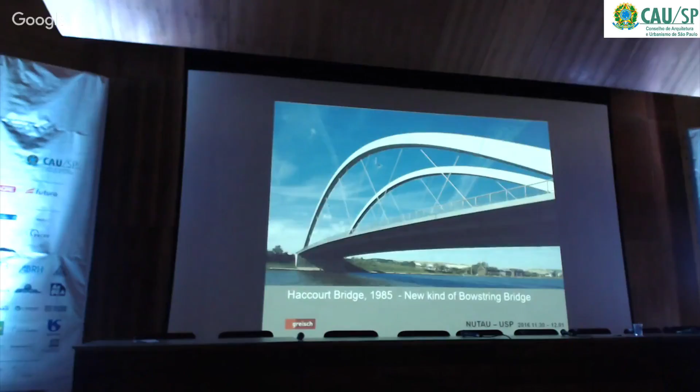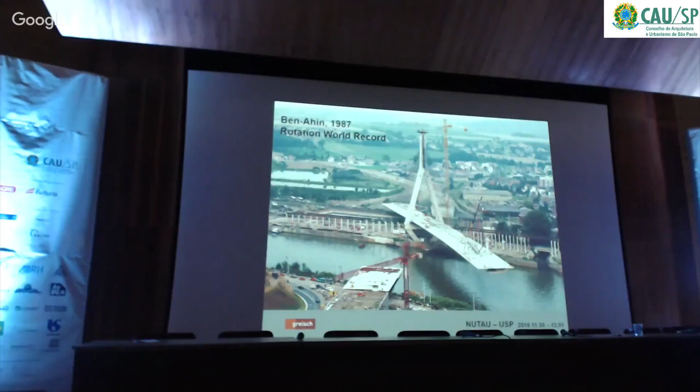I will go quite quickly through a series of projects that we made during the last decades, such as bowstrings here over the Albert Canal. Another one, which is a bit different, but we always strive for simplicity and for logical integration. This one was a cable-stayed bridge, which was built on the side of the river, and then was turned into its final position. And I show you this example because one of the specificities of our studies is that we always try to find clever ways to build the structures in a safer way, quicker, and also to improve the quality of the final elements, such as concrete parts.

This is another realization in Tournai along the Scheldt. And for this realization, we've worked with French designer Nicolas Michelin, because as a study office, mainly composed of engineers, we are, I would say, daily working with town planners, urban landscapers, architects from other offices. So this is really rich, and it's important for the project to mix all competencies, all knowledge from town planners and engineers.

This is another example that has nothing to do with waterways, but I wanted to show you because it was quite funny. It was built completely on the ground, and it was then rotated into its vertical position. It also had a lot of advantages for safety reasons and for the rapidity of the construction. This is another bridge which I'm really proud of. It's called Eau Rouge, and it crosses a valley which is a very sensitive environmental area. And so we had to do this huge arch with the simplest structure possible.

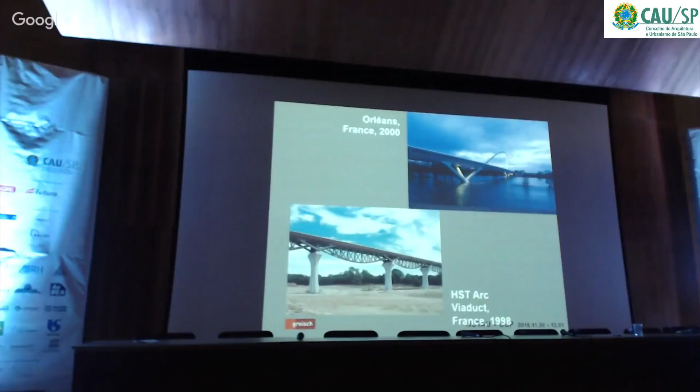Those are high-speed trains, high-speed train bridges. This one studied with a French architect, and this one was designed by Santiago Calatrava in Orléans, and we made stability studies for this complicated bridge.

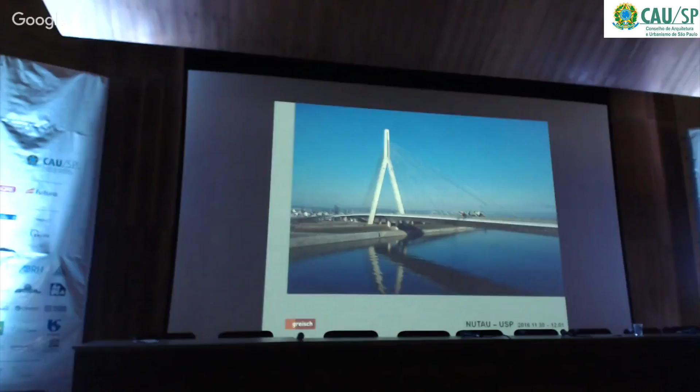There's another example. This one is ours, so sometimes we do the architecture ourselves, and this is the case for this bridge in Monfort. This one was the last bridge of René Greisch. A few months before his death, it was inaugurated. It's a footbridge in Maastricht, in the Netherlands, with a single arch, and it connects a new housing area and the park on the opposite side of the museum. It's very much appreciated by the citizens and the bikers.

This is another example of what we can study. Again, with architect Santiago Calatrava. This is the railway station in Liège, where we had to do all the stability studies of this complicated structure, but a really fantastic station. I live in Liège, and this is really something that enhances the quality of a whole city.

This is another example of structures that we are to study. This is a tower that's in Qatar. This one was also a great achievement. It's a new viaduct in the south of France, designed by architect Norman Foster from England, for which we did all the stability studies.

As another field of activity, we are also specialized in airport infrastructures. And this is another example of a bridge that we designed ourselves. It's at La Réunion, so in the Indian Ocean, where there are lots of huge valleys, as this one, where lava runs through to the ocean. So it gives the occasion to design quite interesting bridges.

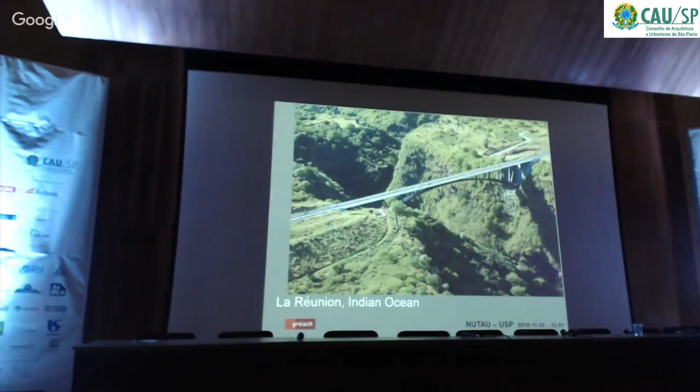This one is the last bridge we studied in an international consortium, and it's in Istanbul. It's the third crossing of the Bosphorus, so it's a bridge of more than 1.4 kilometer span, and it combines two techniques: the technique of cable-stayed bridge and the technique of suspension bridge, which is quite new.

This is the financial tower in Liège. We just finished it with architect Jaspers from Brussels. And this will connect us to the waterways, because for this new lock in Ampsin, the study has just been finished. The project is in tender phase and will start probably next summer.

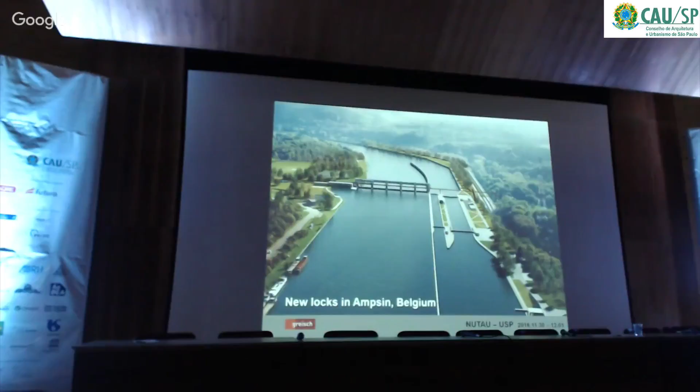It's a very multicultural, multi-disciplinary project, with two locks, with a footpath, new buildings, some landscaping with a path for the fish passage to help the fish to cross the 5-meter difference of levels between the two water levels, and it also includes some railroads. So this is the kind of project that we appreciate, because they mix up a lot of different aspects.

And to end up, I'll show you just a picture of our office during a meeting. So it's open so that everybody can work and talk with everybody. And it's in the forest, so that we keep a quiet atmosphere to think and to be as efficient as possible.

So I go on with the topics of the day. This is the program, the schedule of my presentation. I'll start with a general introduction, 2 examples that were not studied by our office, but that for me are quite representative of what I want to tell you today, and I'll end up with 3 quick cases, 3 structures that we studied ourselves.

So first of all, I start with a picture of the Port of Antwerp. We've already spoken a lot of this huge port yesterday, about more than 8 million containers a year. It happens in all the marine harbors throughout the world. They are getting bigger and bigger, and they accept large boats every day.

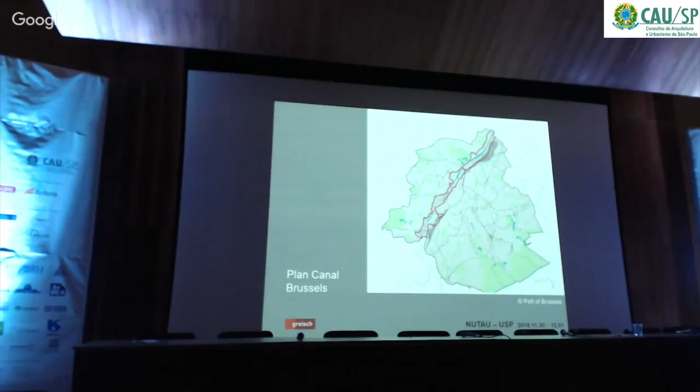So to deal with these questions, I will have a first example, which is the Port of Brussels. Here you see a general map of Brussels, and this red line figures what is now called the perimeter of the Plan Canal. You must know that through Brussels runs a small river which is called the Senne, not the Seine like in Paris. It's nearly the same, but it's Senne, and it used to be a very little river that has been transformed into a channel. So the boats can ship through the center of Brussels through the channel. And it has been one of the major factors of the economic development of the town, mainly for cement fabrication. So this channel and all the port zones located next to it were very important for the growth of the city.

And I was talking to you about the Plan Canal because Brussels is subject to the same prospects I was just talking about. The boats are too big, they don't come inside the city anymore, and besides that there is a certain reduction of, how can I say, heavy industry inside the city. So the surface here in this red line is about 700 acres that the city wants to reorganize following three main goals. Keep the economic activity inside the city. There is still a certain activity with the distribution of cars, for example, throughout Europe. They want to hold it. They have to create housing as an answer to the demographic boom. They expect about 7% over the next 10 years, which makes a lot of people to host. And improve the public spaces.

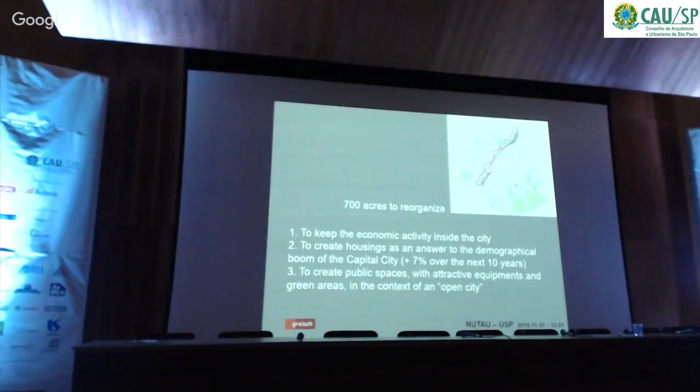What can I say? You've got different kinds of atmospheres along the canal in Brussels. Here you are in an industrial area, linked to cement as I told you earlier, and you can see that the surroundings are mainly devoted to industrial activities. This is another point in the city, still the channel, and you see that it's much more a housing zone.

There are innovative neighborhoods, so the answer that the Plan Canal wants to give is different from one point to another. I'll show you one example: the old Quai des Matériaux, the so-called materials quay, which is now subject to a transformation. This is a simulation of a project by MSA, a Brussels architect company, which will be realized over the next year.

This is an example of the reappropriation of public spaces along the channel. I will talk about the example of Copenhagen, which is very interesting as well. This is a general map; the city of Copenhagen is located here. Those are all channels that are now not used anymore. This is the main channel that used to drain all the navigation through the city, and this is the whole harbor zone. Here with the arrow you see those old docks.

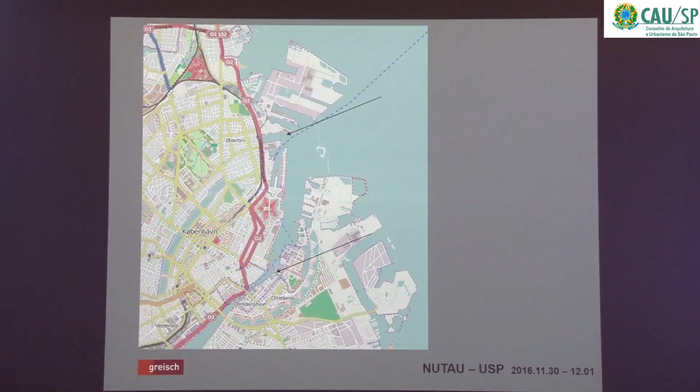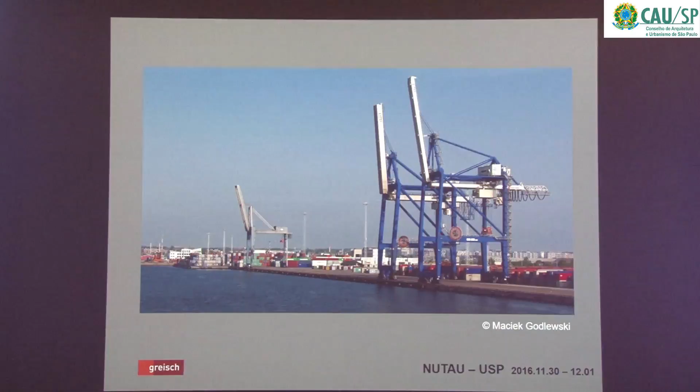For the same reasons I told before, they had to move their port outside the city, as it seemed logical that all marine boats could more easily moor over there. The question was, of course, what are we going to do with those old docks? And they had very interesting answers. This is the kind of landscape you can have in the new harbor, which fits very well with downtown surroundings. So what have they done?

Such kind of things. I think there's a problem with the picture. Sorry, I don't think it's okay.

They have modified their old docks. All the buildings you see there are old warehouses where you can still find the old hooks and structures used to hang the goods discharged from the boats mooring along these walls. And they have changed it, in this case, into housing.

In this case, this was the oldest dock in Copenhagen — it's almost a postcard view. It's called Nyhavn, which was called 'new' at this time, but it's not anymore that new. It's now devoted to tourism and tourism boats.

This is another dock that was transformed into housing and a bathing area. We are closely connected to the sea, as you saw on the map, and people are diving in — well, it's not the sea, it's the channel, but it's closely connected to it. You see all those wooden installations that really give the dock back to the citizens. This is something really important.

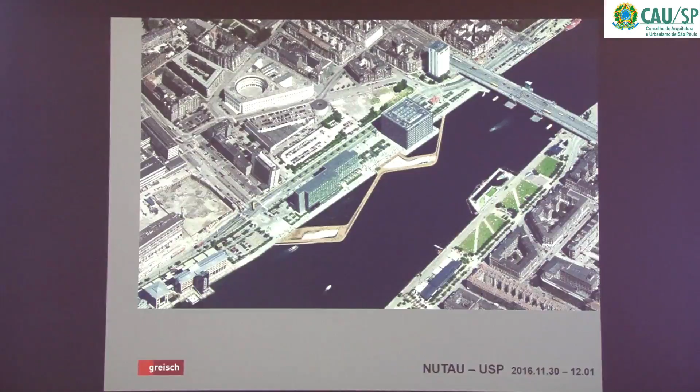An aerial view gives you another example of what they've done with their channel, which was finally too wide — it's funny to say, but starting from something too small, you finally come to something too wide. So they gained some touristic surface upon the river, thanks to Belgian architect Julien de Smedt, to offer these kinds of structures. It has combined with all the other zones I showed you before, and has really given a second life to the river and to all its inhabitants.

Going along the river by bike on both banks is really something fascinating to do.

Having these examples in mind, I will now come to a more technical part of my presentation with three different cases: first, the Port of Liège; second, the Lanaye Lock Complex; and third, the Sart Canal Bridge. I've chosen these three examples because they form a kind of trilogy of what you need to improve an inland waterway due to increased traffic. First, you need ports; second, you need locks; and third, you need improved waterways. So that's a bit of a mix of what we have implemented in this prospect.

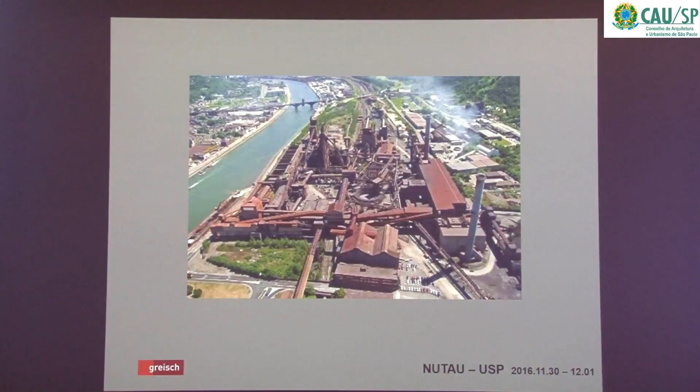First, about the city itself: I wanted to tell you that Liège has always been a steel industry town, where there was a lot of coal — in the past century there was a lot of coal around the city. So there's always been a tradition of steel making in Liège, as you can see in these pictures. Well, most of these industries are now closed because it's the rule in Europe — you don't get the chance to make your own steel anymore, it's not competitive. But it's one of the reasons for the growth of the Port of Liège: the fact that we had steel to sell.

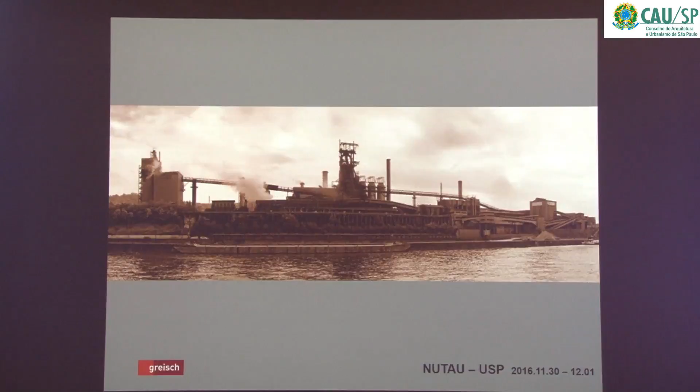Liège is located at a very interesting position in the European market. 60% of the European purchasing power is located within a radius of 500 kilometers, and 56 million consumers within a radius of 250 kilometers. So it's very important for a city like Liège, which is not located along the coast, to have close connections to different transport networks - water, rail, and road must be efficient to reach those different markets.

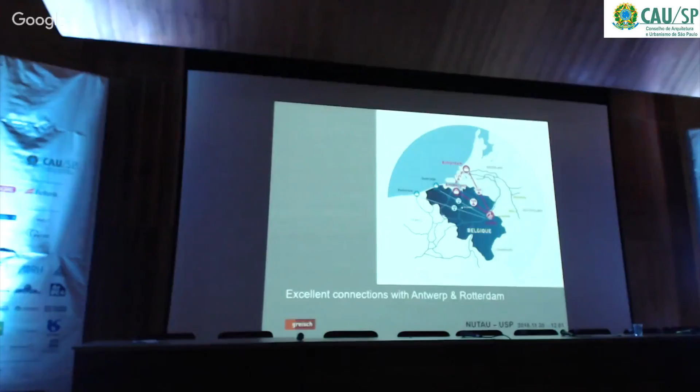Another aspect linked to waterways is the connection with Antwerp and Rotterdam. It takes only 14 hours to reach Antwerp, 12 hours more to go to Rotterdam. You've seen the huge amount of goods that have to be transferred from these ports, so it's very important to have close connections with these huge infrastructures.

Other connections are also achieved thanks to other ways. Antwerp is only 130 kilometers by road, Brussels 100 kilometers by road or rail, Cologne 120 by road or rail, Paris 360, Maastricht 30 kilometers by waterway, and Aachen in Germany 60 kilometers.

About the capacities of the Port of Liège, in 2015 the waterway traffic was almost 15 million tons, and with railroad the total traffic was 20 million tons, and we had about 40,000 containers. The important number is this one: plus 27%.

This is something in a very fast increase, and this is the reason why we needed to extend the port. Actually, there are 3 multimodal platforms in Liège.

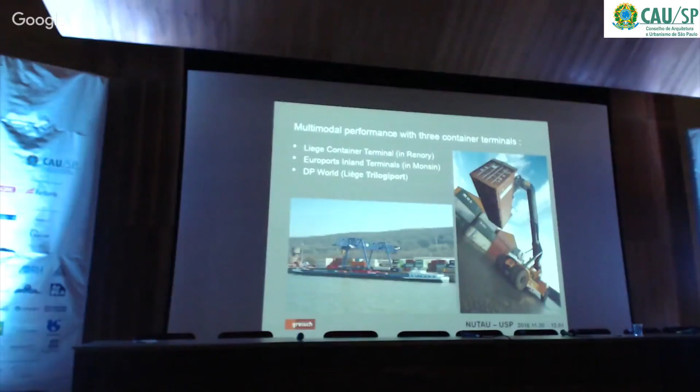We don't escape the same rule as all the other cities; we have to push our harbors outside. What does the new platform offer? Free access to the sea - Antwerp, Rotterdam, and Bruges - 3 transit modes (water, rail, and road), and 3 cross-border markets. It might, at long term, multiply by 5 the number of containers that we have each year.

This is the main organization of the platform. I'll start with a bit of logistics, and come back afterwards to the concept of the platform itself. Here is the canal, here is the container terminal, and here are all the portuary zones with the logistics support. Here is the green belt that has been achieved to protect the village situated next to it.

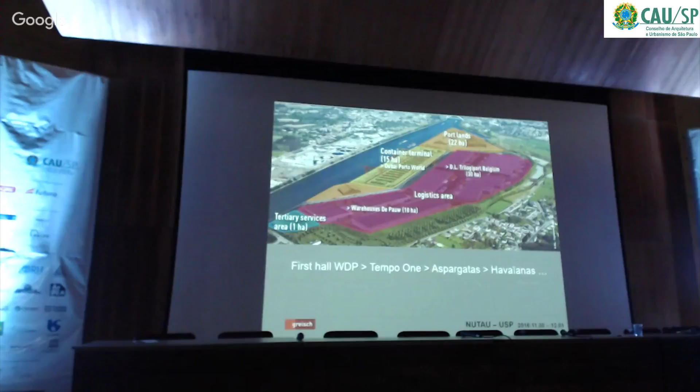I have just a small funny story to tell you. The first hall has been built, owned by Warehouses De Pauw, but the exploitation has been conceded to a French group, Tempo One, which distributes all the products of the Brazilian firm Alpargatas in Europe, including the Havaianas. So maybe Liège is a bit connected to Sao Paulo thanks to this.

Another important aspect is that you don't build such infrastructure on your own; it's important to be connected in an industrial network. This is the case thanks to the relation with the Port of Antwerp and the SPI, which is a local activating partner. And now the first containers have arrived on the platform, so the new container terminal is launched.

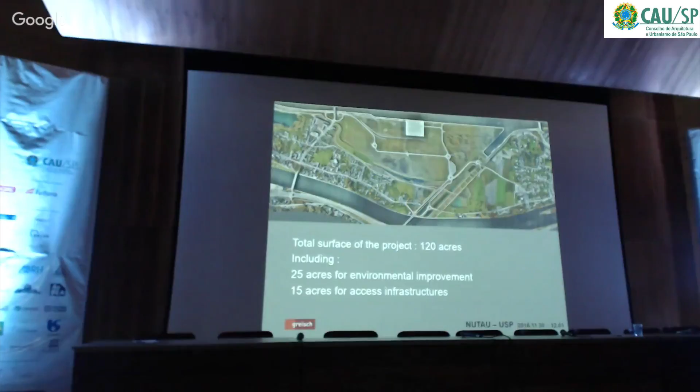So in the project, we have constructed a road network, including a bridge over the highway and the roads, and a series of water zones that are devoted to environmental developments as well as cycling tracks. This is a future view of the complex when it's finished with its series of roads, the full terminal, and some grass surfaces. What is important to see is this green belt, which is half made out of water plants and half made of forest and footpath.

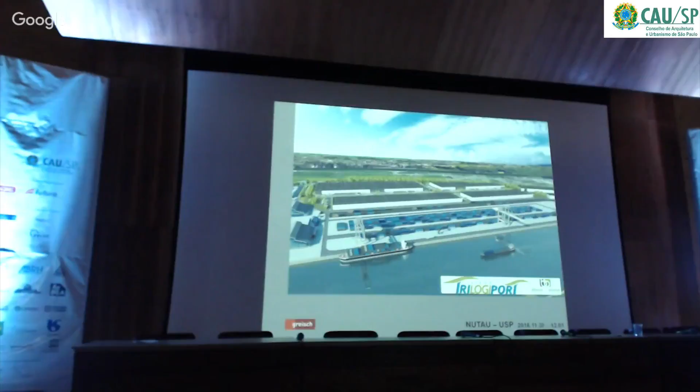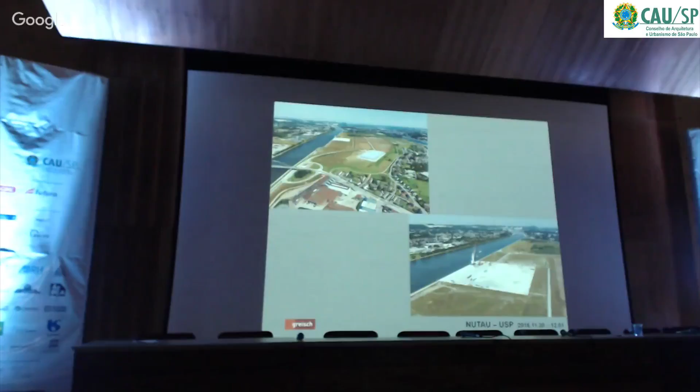This is another view of the completed area, over a few years, when all the structures will be built. Here are a few pictures of the situation today. This is the first hall that has been built. This is the first third of the terminal that is also already in function. And this is the green zone that is starting to grow because trees need a bit of time.

This is the new bridge that we have designed to cross the river and to give a direct access to the zone, because this was also one of the aims - not to disturb the life in the local villages. So this bridge was really dedicated to give a direct access from the highway to the industrial area.

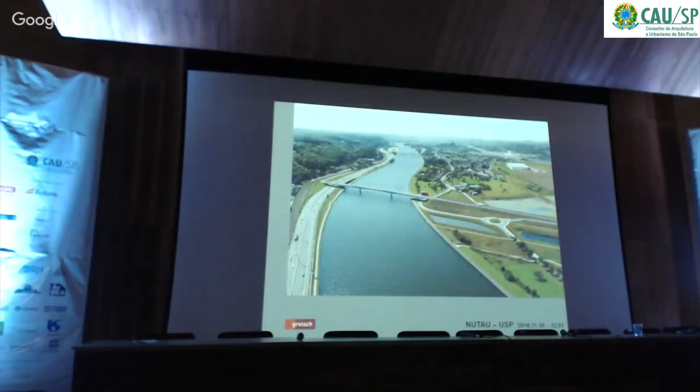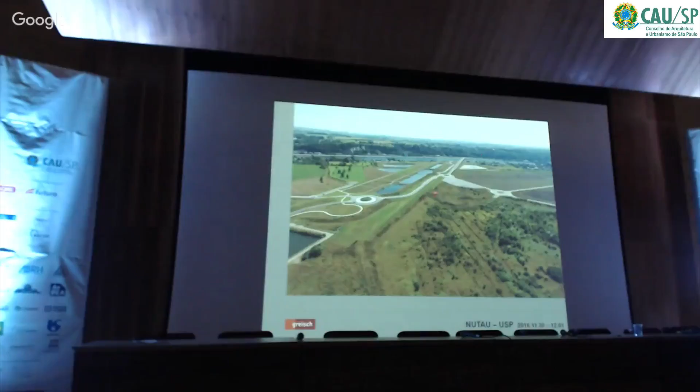This is another view of this new structure. We want it as light as possible, and it's connected to a green axis that I will show you - this one. We worked with our landscapers on this. This is an old dock, an old existing dock, and we continued this line up to the river Meuse, which is 7 meters lower, with a sort of stairs, a series of water plants devoted to walking zones, fishermen, and of course natural development. And this axis was kept for the access road, as you can see on this picture.

So we were talking this morning about a peaceful approach. That's what we always try to do in this kind of project. Things must look simple, because that's the way they will be accepted, and that's the way people will think that things have always existed like this. So it's no surprise, it's just the way you wanted it to be. It's kind of a peaceful approach.

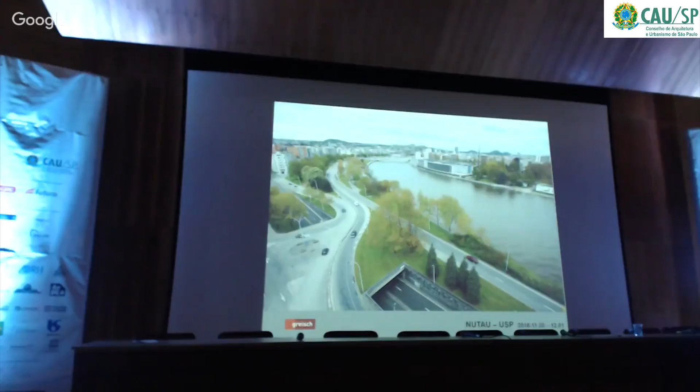We built those highways just along the river, which was such an interesting place. And you can believe me, if you are just walking and you want to reach the bank of the river, you risk your life. So the purpose was to change it, to stop those urban highways which have no sense.

So we made this, which was achieved thanks to the collaboration of French town planner Michel Corajoud. This was a complete renewal of these old areas - areas in used ports, that's important to say. It was a portuary zone that has been earth-filled and now is given again to the citizens.

So we have kept a boulevard which has nothing to do with the highways. We've got crossroads, we've got red lights, a series of pedestrian ways, and moreover, we have given the quays back to the people. We have also built this new footbridge that connects this zone, and you'll see on the next picture, this is connected to the station, and this is a park. So there was a real need to connect those zones, and it was really asked by the citizens as well.

This is another view of the project that has been achieved last year. This is the exit of the tunnel. We kept a small tunnel that goes this way, and that helps the cars to get out of the city when they are in this direction. And the rest has really become peaceful again, and is welcoming for all the different types of users. And this footbridge is a connection with the right, with another view that Paula showed you earlier.

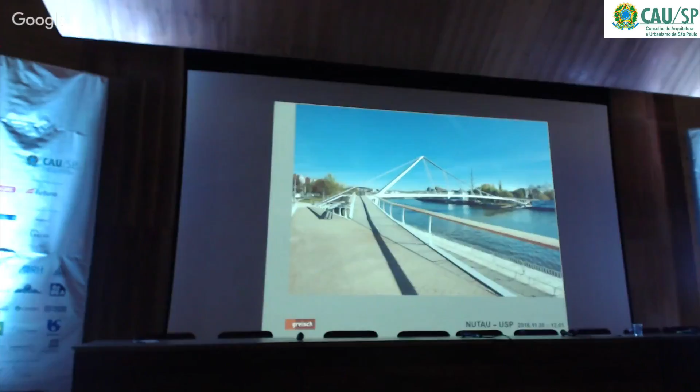This is the new footbridge that has been designed for all kinds of users. So people with bikes, people that have mobility problems, and most of all, it's also a place where you can rest. You're not obliged to walk to it. You can lean on, you can sit on the main entrance.

This is another view from the right side of the river. This one inside the park.

The connection of a footbridge with its abutments is really important, because the footbridge will be used if the people can reach it. So we made different ways of reaching the footbridge from different places in the park, on the right side of the river.

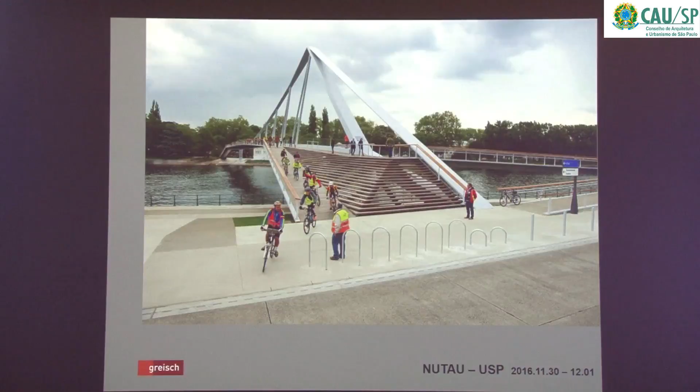This is another example, I think it's a class of a school going to an event and biking through the footway.

Besides this footbridge, I told you there is this new area along the Meuse, which has become a real friend for all the citizens.

Now I will talk about another project, the Lanaye Lock Complex, which is a more technical work, but you see that the achievement keeps the same. This is an industrial infrastructure dedicated to high tonnage boats, up to 9,000 tons a boat. It is huge, really big, and the goal of the design is to make it human.

So to let it keep a human geometry, a human aspect - this was the goal.

This is a simulation before the works. We had two old locks from the 1930s, a third lock from the 1960s, and the new lock to be built here.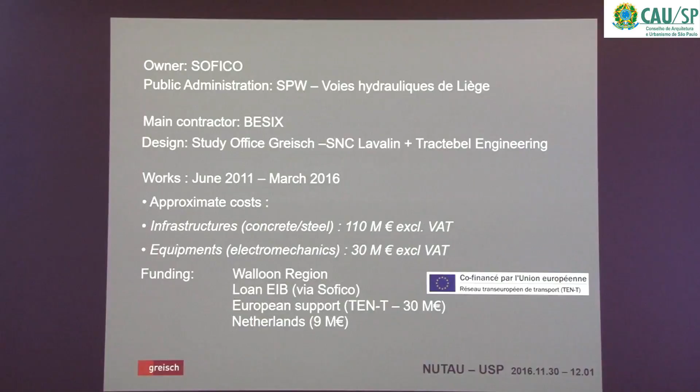Just a few more dimensions: the lock is 225 meters long, 25 meters wide. The head is 14 meters. It is managed by butterfly valves and longitudinal culverts.

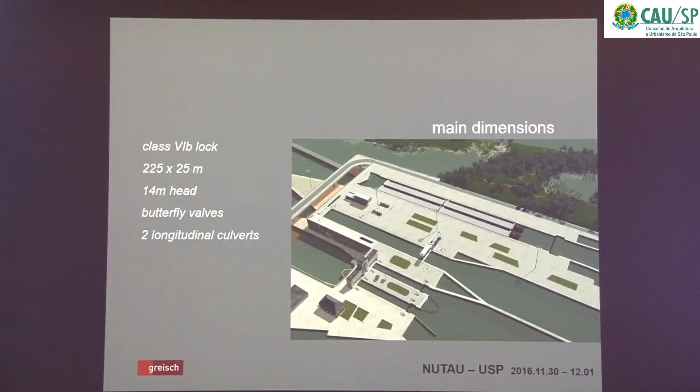This is the location, you see the border between Belgium and the Netherlands. You see these three old locks, and the new one had to be built upon the border, which led to a series of discussions about financing and compensation zones.

You also see on these pictures that we are located in a very green area. It's a protected zone for fish and for a lot of kinds of birds. This hill is also very symbolic with a very particular ecosystem that had to be protected.

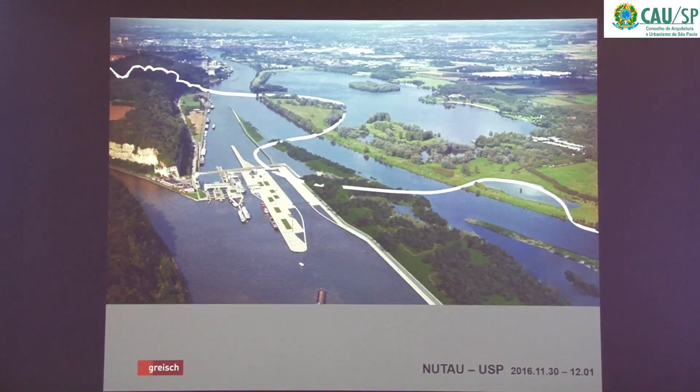So our first idea was to have a simple geometry. As I told you, there are 4 structures that have been built at different periods, with different methods and different answers. We wanted to reunify the whole site to make it as simple as possible.

That's the way we started to think of making a block, which would involve old material areas - a zone used for technical purposes. The third lock, the central pier, is equipped with a hydroelectric and pumping station.

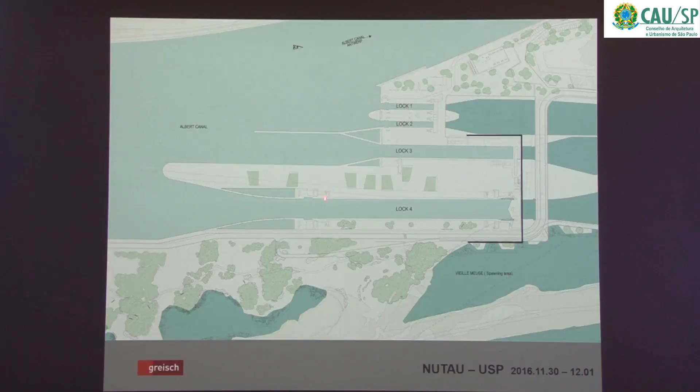The new lock, and here is also a tunnel, because cars have to reach the downstream zone if necessary. So we had a full structure that we wanted to group so that we could have a simple answer.

So this is again a simulation of this block, and the new bridge crossing the whole site has been detached a bit at the downstream zone so that it could simplify the reading of this lock system.

So the lock itself - I won't be too long about the technical aspects, but there is a lot of science inside the structure, such as this transversal, a cross-section of the structure with the central zone where the boats come up and down, and the lateral culverts that help to fill and empty the lock.

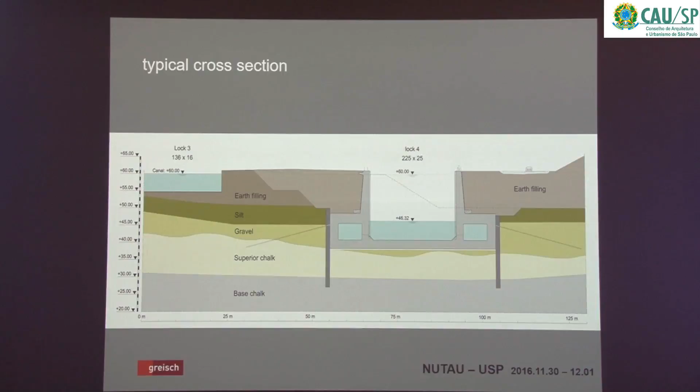This structure lays upon different layers of ground that are particularly sensitive to underground water flows. So we had to build diaphragm walls all around the structure to ensure long-term stability. This is the kind of thing you don't see, of course, when you come and visit now.

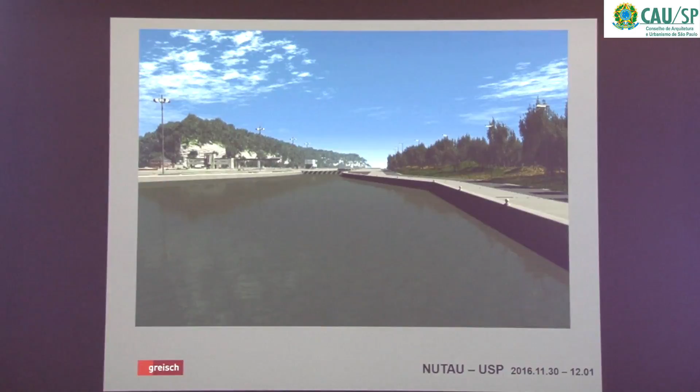Another aspect I wanted to talk about is the downstream door. You see these old structures that had been built previously for the 3 first locks. This is the new structure. I was talking about simplicity - this was our goal in this case.

This is a photo of the door that lies under the water, of course during construction stages, before filling the lock. And this is just an example of the calculations that we made for the design of this structure.

All the equipment needed to steer the door is located in a very minimalist block, and nearly everything is inside the ground, so that you have something that keeps at human size.

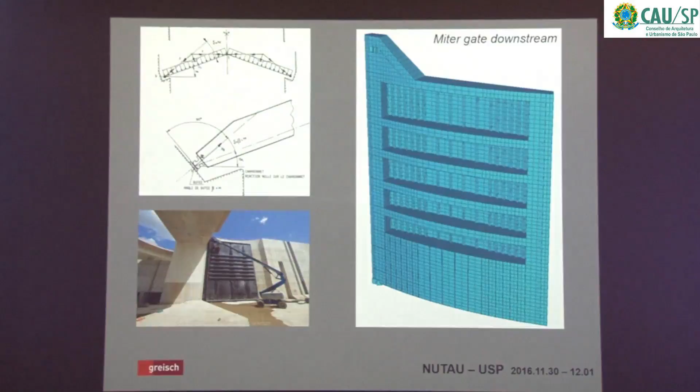I have a small animation, I hope it will work. Doesn't seem to... just wait a minute. It should work, it's a video, it's a video that should go. Do you have a separate file? No, it's inside. Well, okay, sorry for this.

I will try to explain without the video, but what you must know is that this structure is put inside a small concrete structure which has a steel grid so that it deserves natural light. These jacks activate a kind of small car on its rail, which itself activates the bars connected to the door, so that everything moves under the concrete surface. I'm sorry for the video.

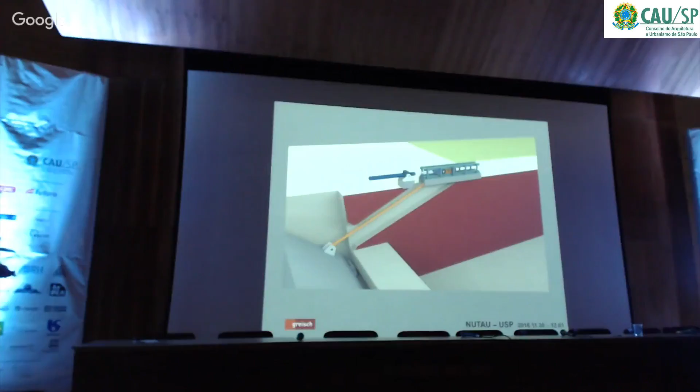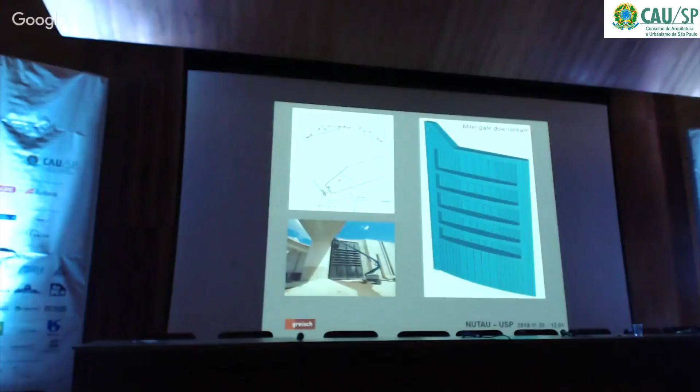This is another view of the downstream door, and what is interesting is the huge size. You see here this elevator with the guy working on this. This is about 20 meters high. So those are huge structures, partly under water level, but they have to be built as simple as possible, again in the same aim of simplicity.

I told you about this structure, located in the center here, and it's also in the context of a sustainable world. As soon as you build such big blocks, you have great water consumption, and in dry periods you might have problems in the river because of that. So we built a central pumping station in this situation, so the water comes back to balance the weekly consumption of the whole site, since we need 4 blocks working together. In wet periods, on the contrary, we have too much water, so we need the same infrastructure to produce electricity. That is an interesting sustainability aspect of the project.

I told you about the bridge. Here again we wanted something simple and sharp. We have a steel box girder and a concrete deck over it. Just a single pile at the angle, and this 90 degree turn keeps it very light.

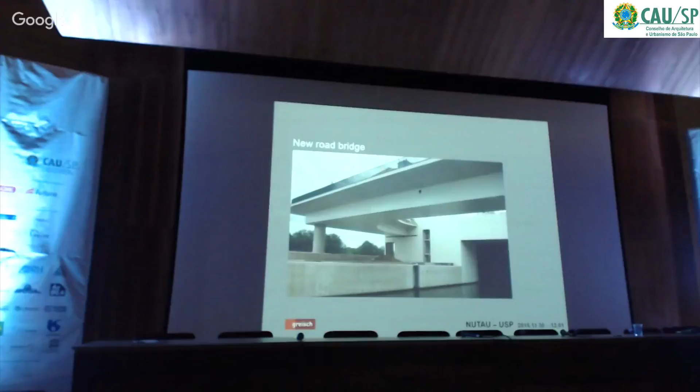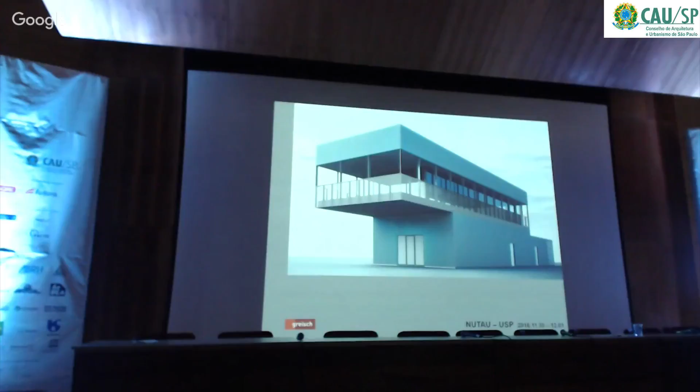Another related work is the design of the new control building, which will take the lead over all the blocks, and of course the development of environmental zones. This is a fishing zone for the reproduction of fish, which has been built and planted so that with different widths of water, you can welcome a large series of species.

Other related works, such as hydraulic studies in collaboration with the University of Liège, were also important in this multidisciplinary project. I have now a series of pictures of the construction stage. You will see all the technology.

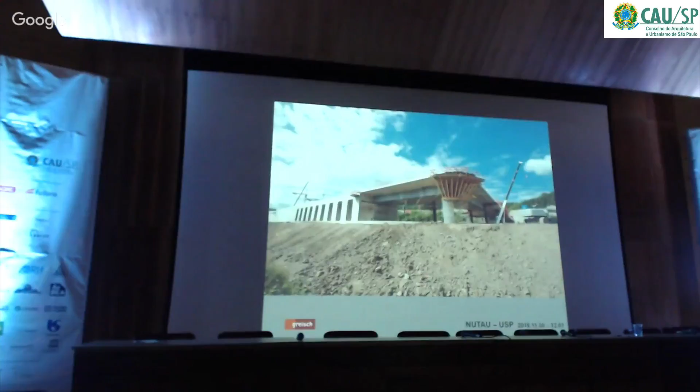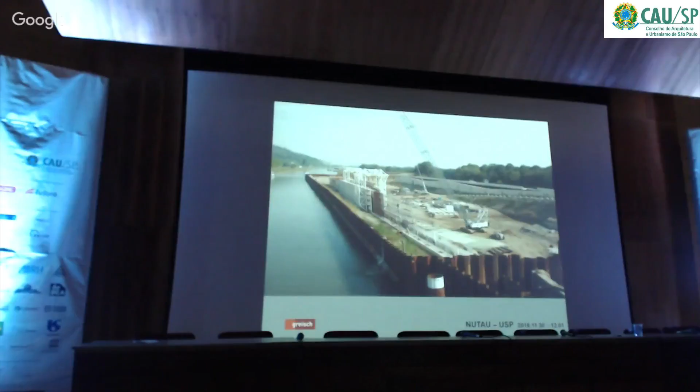The completion of the downstream structure, with the construction of the bridge, and here you can see the 4th block being started, reinforced and completed. This is a view of the empty block, where you can see the two guys making a screen inspection. This is something very impressive, about 22 meters high.

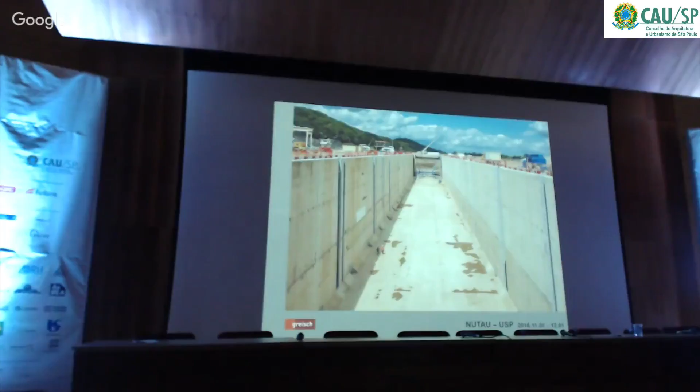We often say that when you have to build a very big structure, such as a retaining wall, before building it, be sure that you really need it, in this case to develop navigation. But when you see those huge structures and translate them into another environment, such as a retaining wall, I know there are many cases where, if you think about the topography and the geometry of the work, you might not even need to do it. So it's something we must keep in mind, closely connected to what we said this morning: you don't only have to think about how to solve the problem, you must also think about the question why.

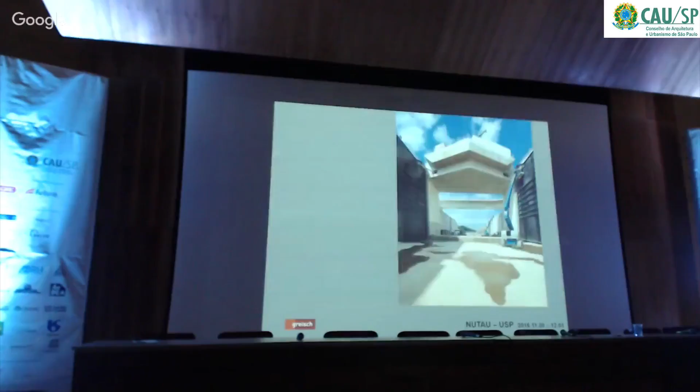This is the final view of the lock that is now in service and being used. You see the lock, the door I was talking about, which works really well. You see all these zones that have been replanted. Some parts, of course, nature must take time to grow and develop, but mainly it was required to give the complex a unity and a kind of peaceful context that it certainly deserves.

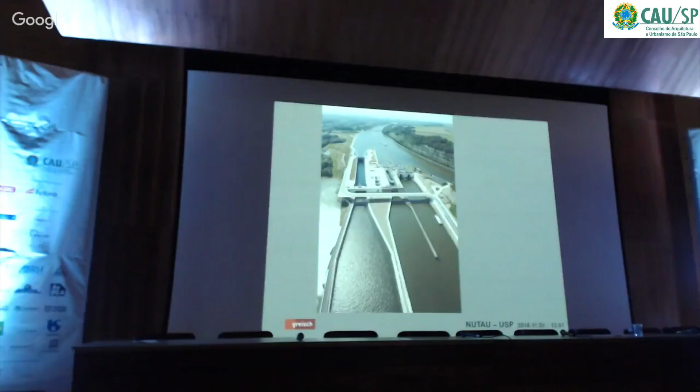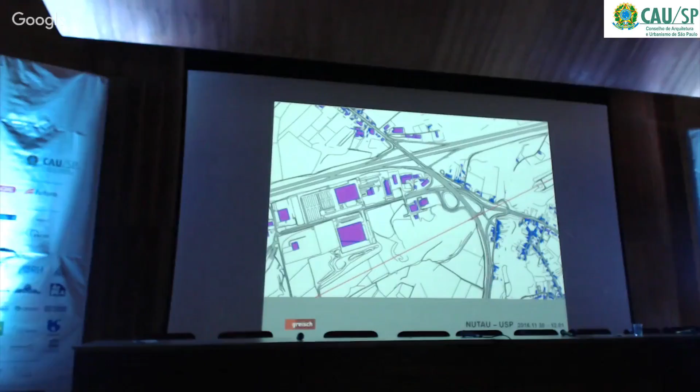And you can see here on the right side the extremity of the existing canal just before the construction of the bridge. And the purpose was to build a bridge for the canal in this direction. And this led to this construction. It's important to say that this is a valley, not a very big valley, but a valley nevertheless, where there is a small river that is partly in the ground and partly on the surface. Of course, this bridge is 500 meters long.

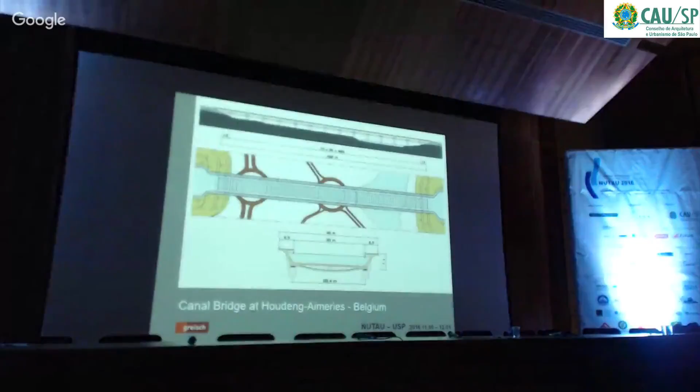There's no way of earthing the whole valley, of course, because of the river, because of the village, because of the road, and because of all the surroundings, all the views that we want to keep. So it was decided to build a canal bridge that you see here in the lateral view of about 500 meters long, 33 meters wide useful width, with a series of piles with a distance of 38 meters. So that means that you have a series of square shapes, or nearly square shapes.

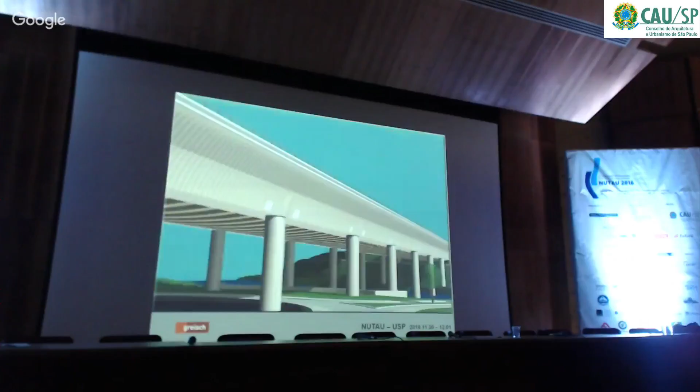And if you know a bit about concrete design, calculating such huge plates of about 35 meters along each side is not something that easy, because the width is similar to the span. So we made a series of simulations for the works to show how this new bridge should be integrated into its environment. And you see just as an introduction the picture of the work that has been done, and it looks quite like the simulation we showed.

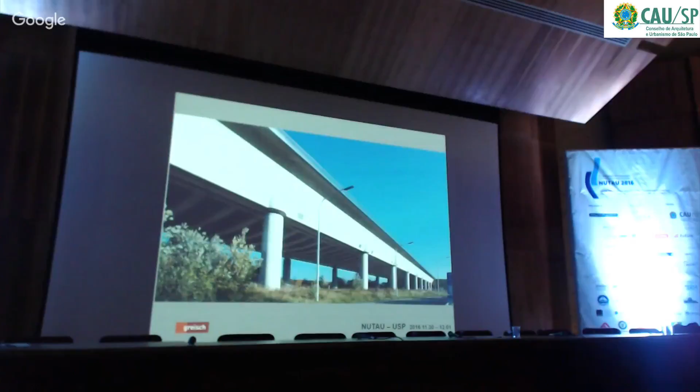What are the specificities of the structures we designed? The side walls are viewed as main structural girders. So that means that we don't have any longitudinal beams underneath the structure. It's the structure itself, the lateral walls that are used as beams. We give the structure a high hyperstaticity degree, which will give nearly no joints, one joint at each extremity, but no intermediate joint, so it improves the waterproofness. A limited number of supports, I told you only 38 in each tier, and a series of crisscross transversal beams.

So this is the cross section. All the structure is fully in concrete. You have those precast crisscross transverse beams, and all the rest of the structure was cast on site. You see the lateral view. We imposed casting with small wooden strips, so that it would break the linearity of the structure and give it a rhythm. This rhythm is reinforced by those elements that are located in front of each pier and that reinforce the structure at the supports.

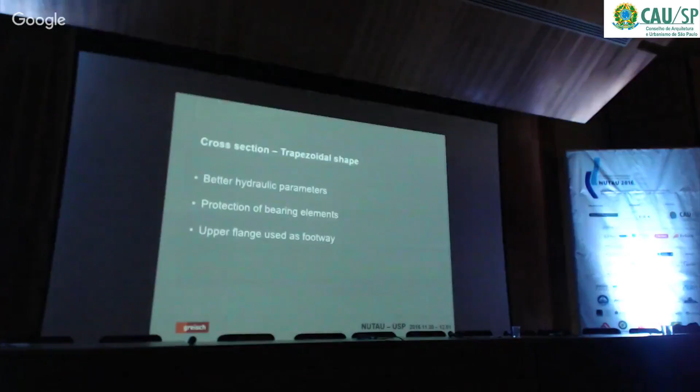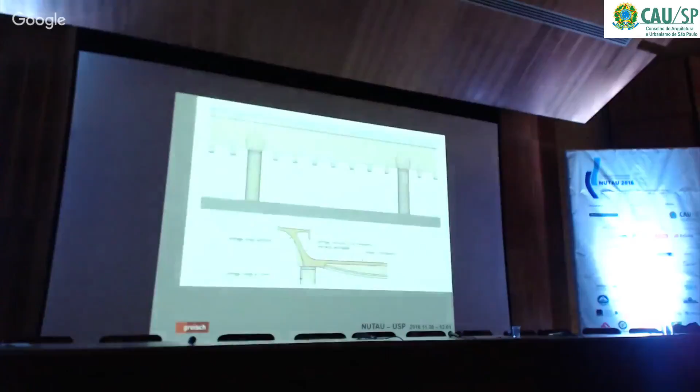Why have we chosen a trapezoidal shape? It has better hydraulic parameters than a rectangular shape. We have extra width where the boats don't go, and that can help water to flow around the boat easier. So it widens a little bit the hydraulic surface. It gives a protection of the bearing elements. So this concrete plate helps protect the bearing elements from boat shocks, and it provides a footway on the other. So this is the cross section that has been designed.

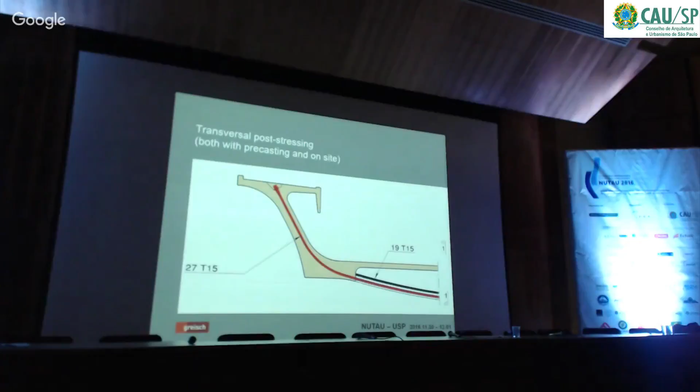Something important is that there is a lot of pre-stressing in those structures. Concrete is watertight if it's compressed. When you start having some traction, it's bad for waterproofness, it's bad for durability. So in this structure, we wanted all the surface of the concrete in contact with the water to be kept in compression. So there was transversal post-stressing. This pre-stressing was organized in a sort of V-shape, as you can see on the upper view.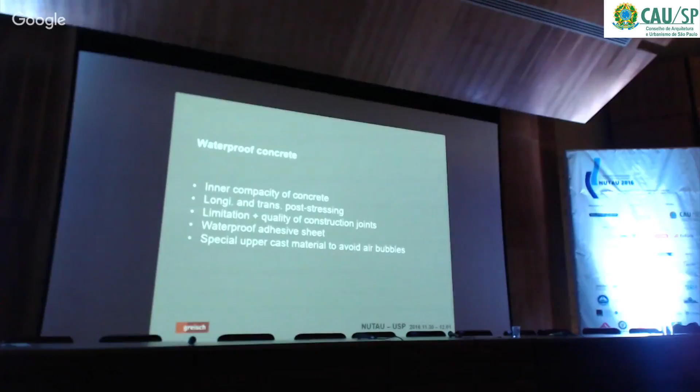We did some other actions to ensure the waterproofness of the concrete. We gave it an inner compacity by choosing the ratio between the different components of the concrete. We placed this post-stressing I just talked about. We limited the number of joints. We added a waterproof adhesive sheet, and we imposed a special upper cast material to avoid air bubbles. So those were all the impositions that were given to the contractor before he started the works.

And we also imposed a launching method. It has a better execution quality. Remember what I told at the start of my speech? I was talking about simplicity of construction, security for the workers, repetitivity, and quickness of the construction. It's been offered by the launching method. And also we avoid traffic conflicts with the speedway running under the bridge.

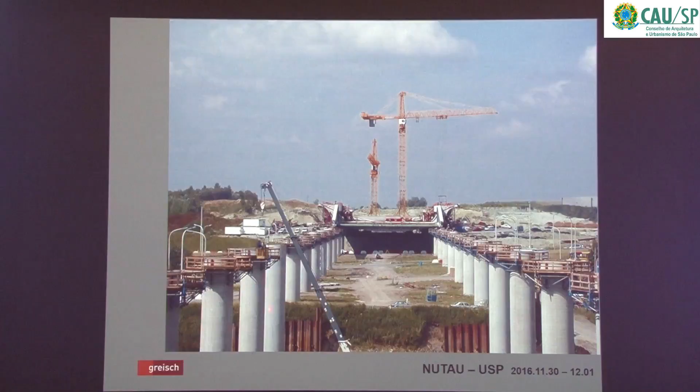So this is a view of the start of the launching. You see all these piers that have been cast before the bridge comes over it. So the principle was this one. You had this steel nose that was used to help reaching the next pile every time. You had the first concrete elements, and the crane added the casting material. A new section of 12 meters was cast on side, and the whole structure was pushed upon the existing piers.

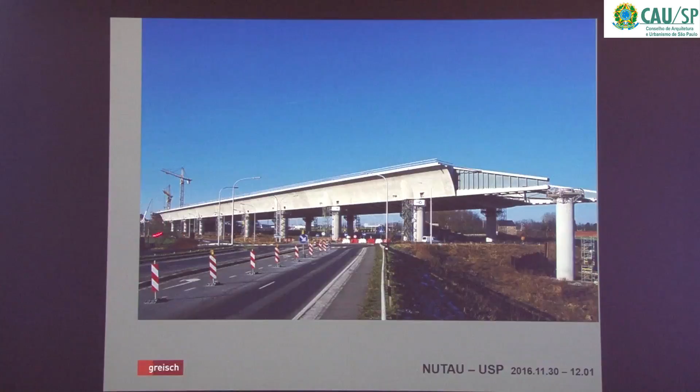This is a view of the construction. You see that the speedway keeps in service, and there is nobody walking in there. It's only a forest of columns, but everybody walks at the backside.

So this was another video, but I guess I might have the same problem as the previous one. It seems to work.

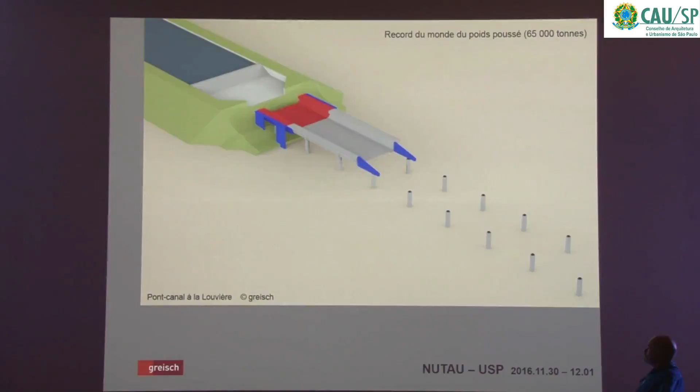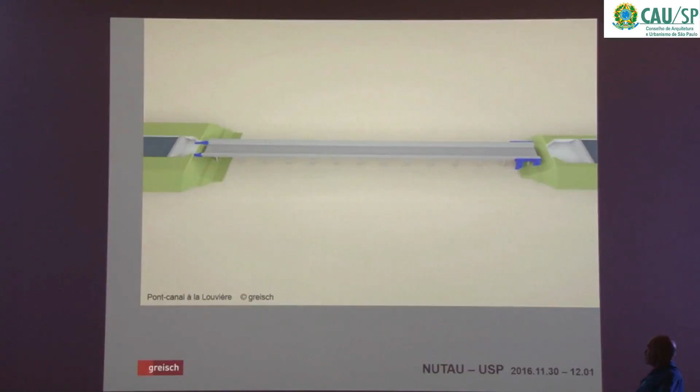So let's have a look at the construction. This is the casting area. This is the steel nose. This is the first element, and when it's dry, it goes on, and we push the whole structure. At the end of the launching, it became a world record for the weight of the concrete structure to be launched, 65,000 tons. It speeds up a little bit, but you see how it has been done. The connection to the canal, then it's been filled in by water, and the first boats came through it.

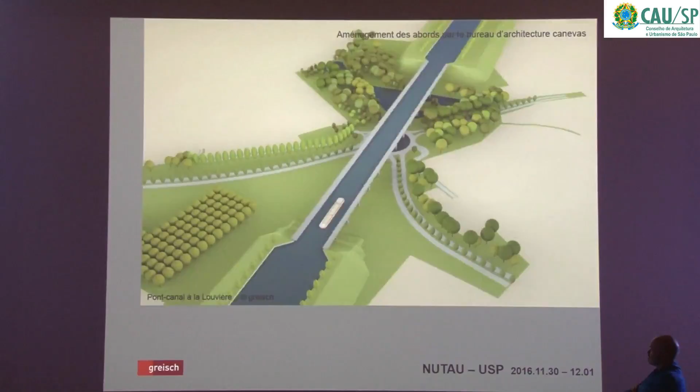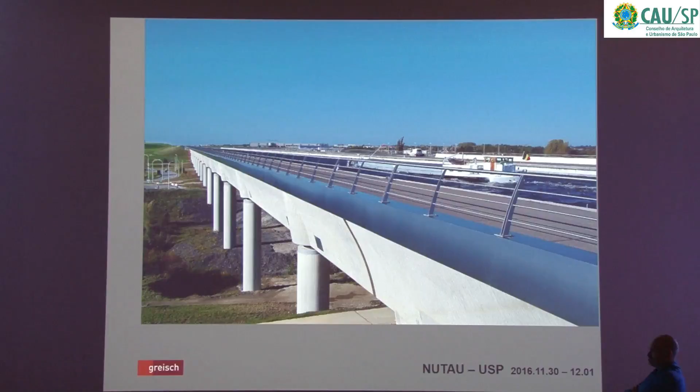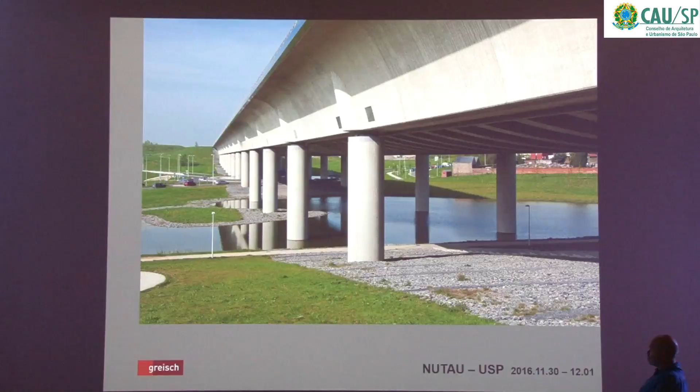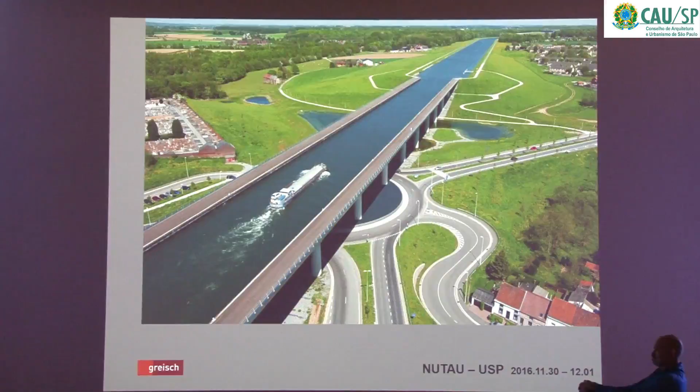To end up with this kind of structure. You see that the green horizons haven't been broken by the structure. Of course there are roads, but there were already roads before, and we try, again, not to push, but to lay the bridge on its surroundings, as if we had touched nothing. But in fact, under those piers are very heavy foundations with large boreholes and all the technique that I've been just explaining. This is another view. You see that the village keeps connected to the surroundings, the river, and these green areas without having a wall in front of it.

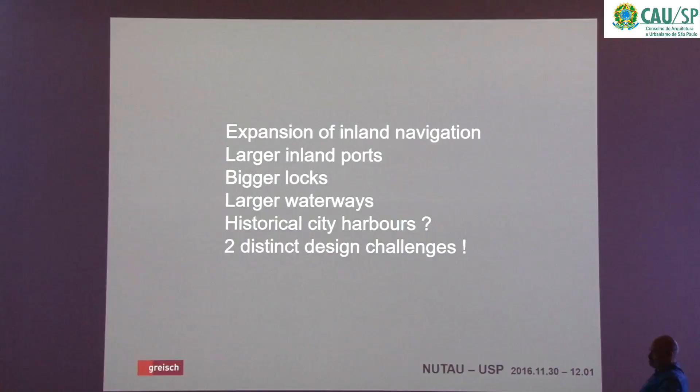So I will now come to my conclusion and just repeat the main facts. We face an expansion of inland navigation, which we're proud of, but it needs typical answers in the hinterland. We need larger inland ports, bigger locks, larger waterways. And with all of these aspects, we have to rearrange our historical city harbors. And I'm glad that this topic was also given by previous lecturers, as it concerns a lot of cities. So two distinct challenges.

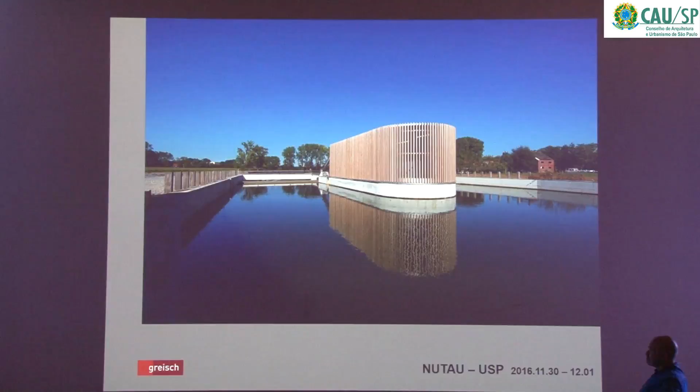This is an example of a weir that we've just ended up. It's on a river called the Dender. It's in Belgium, and it's an automatic weir. So nobody works in there, but we need it to have a fully automatic structure with an equipment building.

I think that we must think about simple solutions, about logical solutions. And so I would say that my wish is to promote strong, simple, undecorated and plain solutions, a respectful approach of the landscapes, and durability of the structures and the spaces might be found through such a peaceful approach.